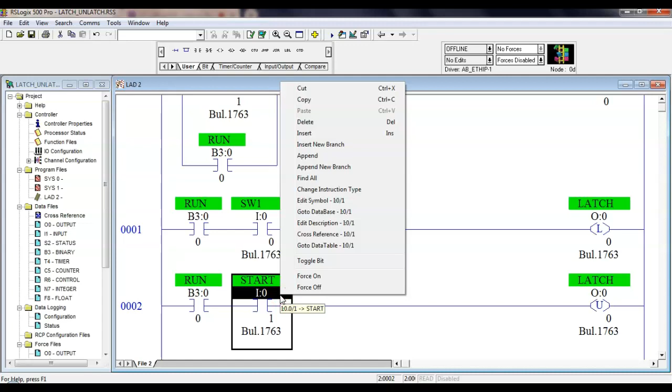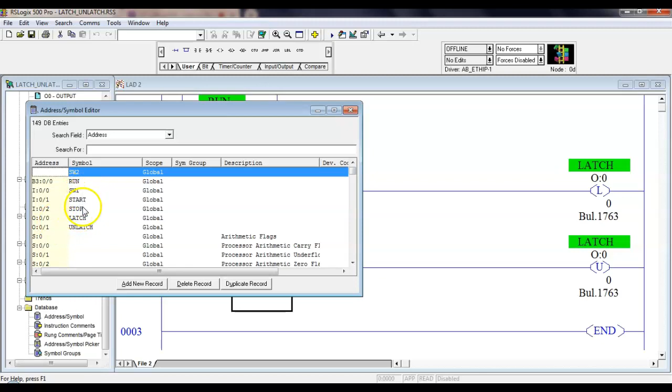1 and 2. So here I'll use 3. I don't see where I'm using a 3 up here — yeah.

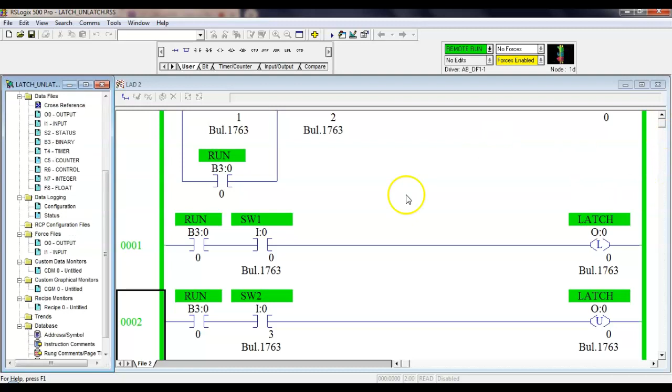And I'll switch 3. So I'm going to go over here, switch 3. So 0 is what? Latched it. Now it shows both of them true.

And why is that? So this is the same address, right? You understand? So here, this is output 0, and this is output 0. So these guys have got to be used in pairs, which means if you use a latch, somewhere you've got to have an unlatch for the same output, or whatever you use.

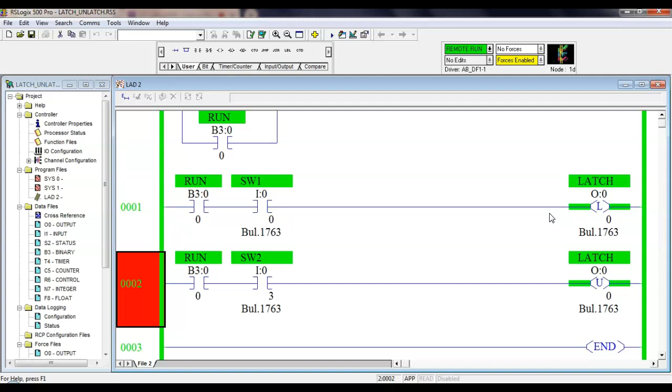So what they did on the Festo line is the whole sequence, since it didn't need to generate an output till it figured out what was going on, they used latch and unlatch, and then they used B3 files because they didn't need an output, right? You understand that? So we call these internal coils, which means they don't use one of your what?

They don't use one of your outputs. So if I've got a coil that does not need to turn on the light, does not need to start a motor, does not need to energize, then we'll use what we call an internal coil. And this is the big advantage of a PLC.

So if this was relay logic, I would have to have what we call a control relay. We call them control relays. These are relays that never leave the control circuit — their contacts never leave the control circuit.

And these are the relays that the PLC basically takes away, so we don't have to have a real relay anymore. So if you take motor control, you'll see that we have these control relays, and they don't do anything but what? They don't do anything but control.

They just make decisions. So this is latch and unlatch. It's a really powerful instruction — it takes the place of a lot of these. So I could do the same thing with this thing up here.

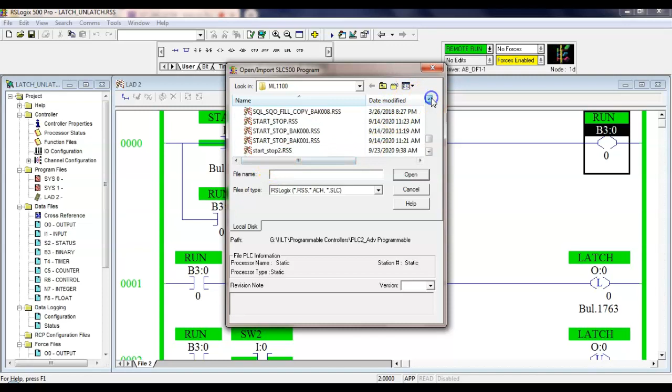In fact, let me just open up another file. So these are all the programs I have on my server over there. This is just a standard stop -- this will be easier to show y'all. And I can always redraw this. So this is just a standard start-stop.

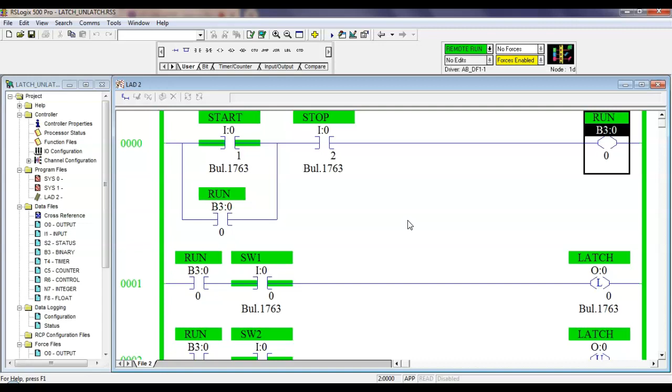And this is pretty powerful -- you know, you can create programs without having a PLC connection. So this gives us the ability to... this is a troubleshooting aid if it ever loads in. That allows us... it's probably been faster to just create a new program. So...

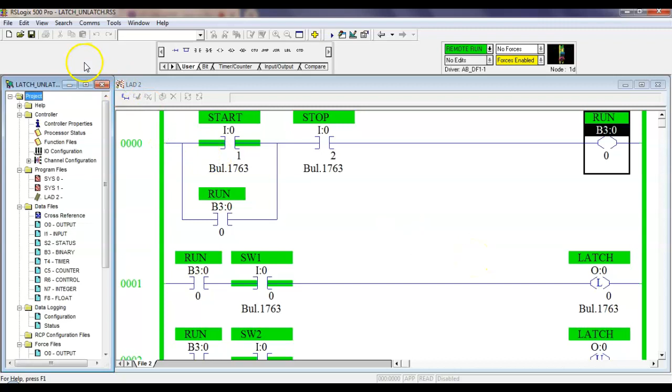And the other one might not work anyway. It might be today just isn't my day.

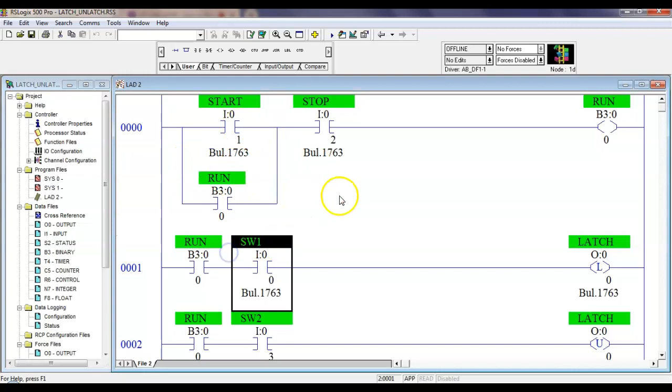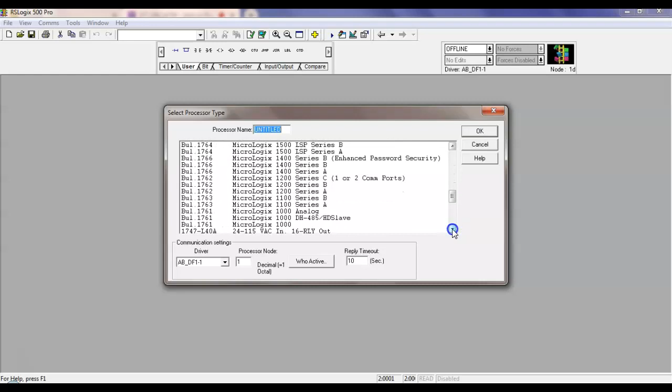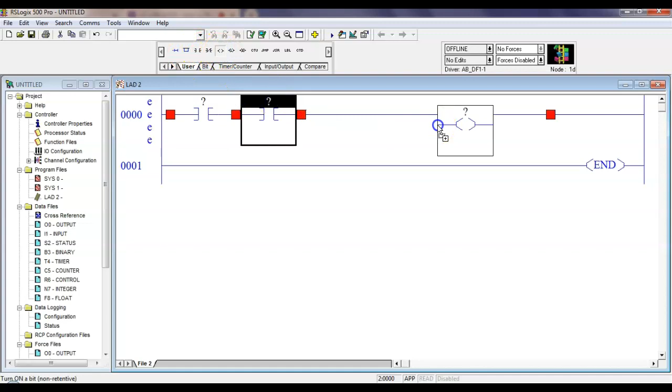So what I'm going to do is just create a basic start-stop station. It'll come over here and set up a new rung. Come up here, go down to there. Go down there.

Put 0/0. So here, if we look at our project tree, we'll see that inputs are actually in data file 1. But we can't have multiple of these. These are set by the hardware, so that means if you put input, it automatically uses data file 1.

So we don't have to specify the data file. Even though I'm pretty sure I could call it input 0, input 1, data file 1, 0/0, and it still works. So it knows where your input is. We don't have to tell it where the input is.

You gonna tell everybody what's on your phone there? It's so interesting, it's more interesting than...

We'll assign this to, we'll actually force an output so y'all can hear it. So output colon, and I got the motor hooked up to output 0/0. That's where the motor's hooked up to, so y'all can actually hear it run.

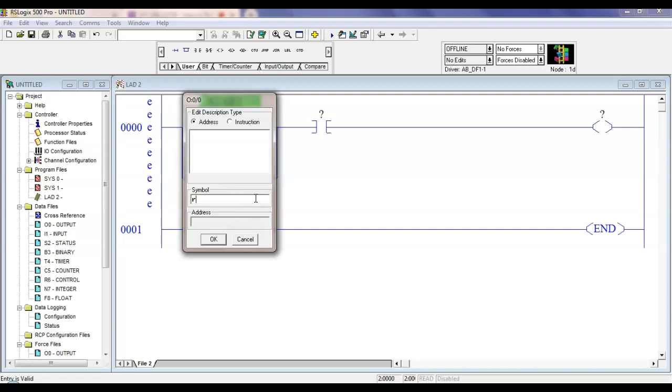We'll call this run. Now we've assigned this contact to an output, but I can go ahead and give it to, and then I can come over here and use that. See? Do it.

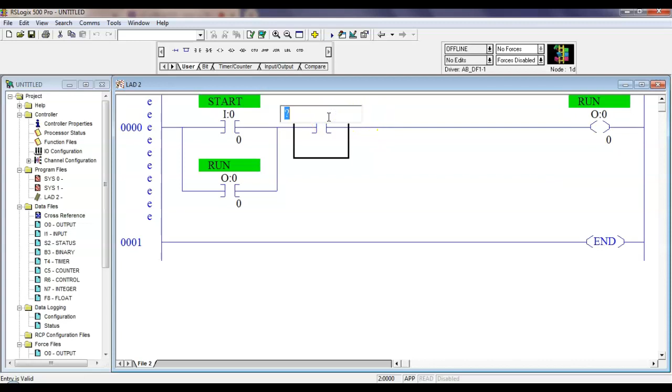And then we'll assign this to input 0/1. We'll call it stop. You don't have to be stopped. Okay, we'll check for errors to see if it's okay.

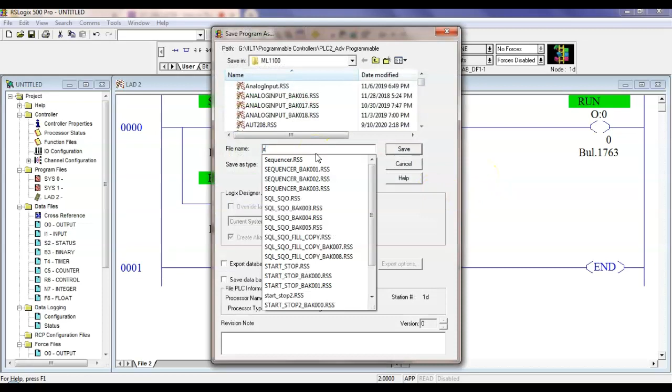And then we'll download it. Give it a name. By the way, you can save it as untitled if you want to. Go online. Okay, so I can come over here and I could use my switches to control this one.

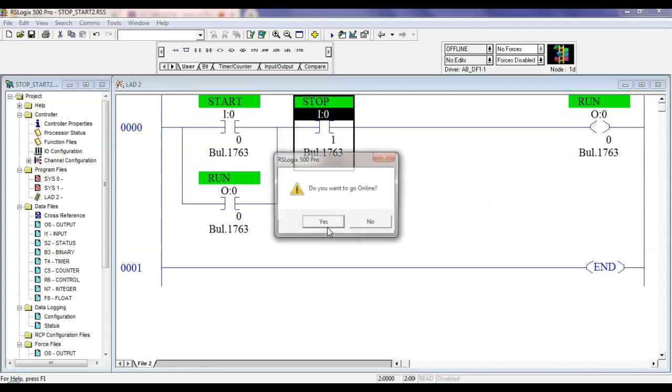I still have my push button control. I started running that. So, okay, I say okay, I'm having problems with output 0 running. Let's see if it's the actual output.

I'm not hitting any push buttons or switches, and I just force that out. If I don't want to force it, I put a 0 there. I have to come over and highlight it again, just hit delete and hit enter, and then...

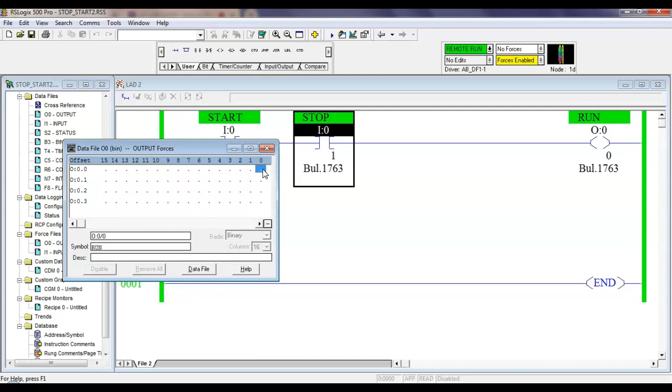I can force inputs. So I can see, technically it's called simulate, but we still call it force. So output 0, I could come over here and on input 1, I could put a 0.

And then I could come over here on output 0, and I close my force table. I could come up here and now what's the problem with this? You could hurt somebody. Yeah.

So you better be sure when you force these things that you understand the consequences of what's going to happen. You need to make sure everybody knows you're fixing to force that contact, because what you've done is you've taken away every safety feature that's in the system. So it's not going to check to see if sensor 1 is true, which nobody's in the robot cell, right? You understand? If you force that thing, it's going to go down. But it's a really good troubleshooting tool to use.

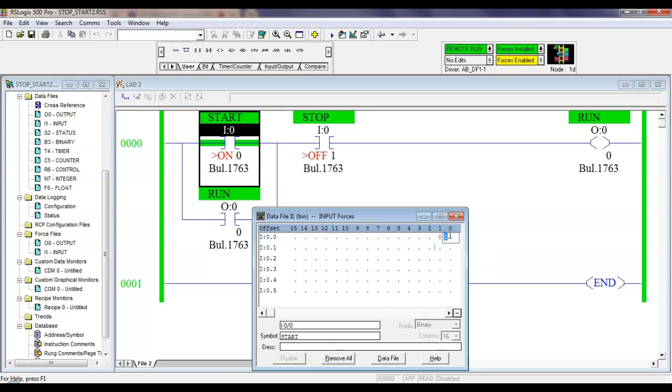Yeah, there we go. I wasn't hitting the enter key. And now it's back being controlled by my push button. So that's forcing.

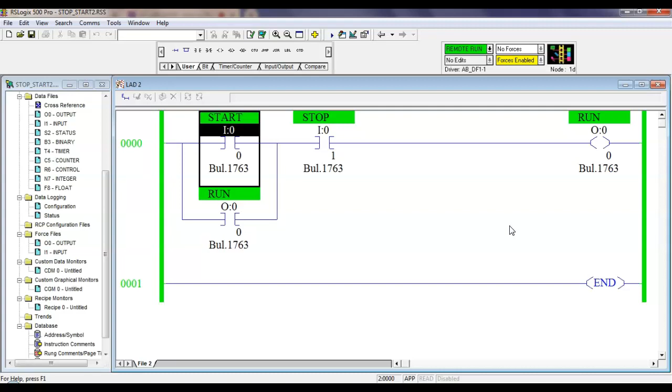Pretty cool, right? But you can do what? Force mode. And by the way, relays, most relays have this feature also. You can't see this on...